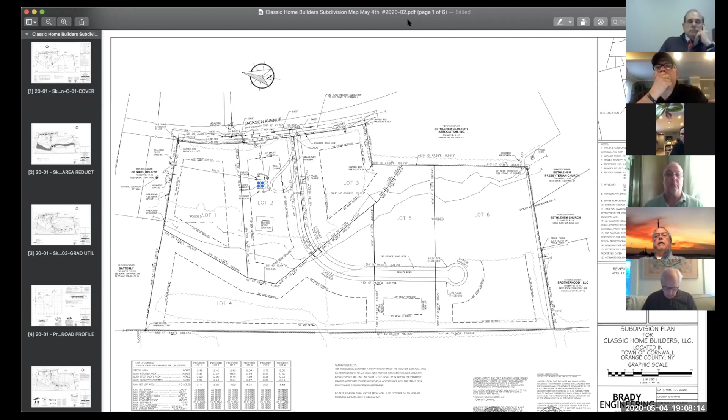Let me see if I can. Did it come up now, Dominic? Yes, Dominic has it marked in blue, I believe. Correct, Dominic? Well, that's me, but let's see if I stop sharing my screen. Does that give you the ability, Pat? Yes, there we go. Now Pat's sharing his screen.

Working out the bugs. Okay, so each of the lots will be served by individual subsurface sanitary disposal systems and individual wells. We have done soil testing for each of the lots, which were witnessed by the town engineer, McGoey Hauser. All the lots are compliant with the current zoning. We've taken into consideration the slope areas and wetland areas.

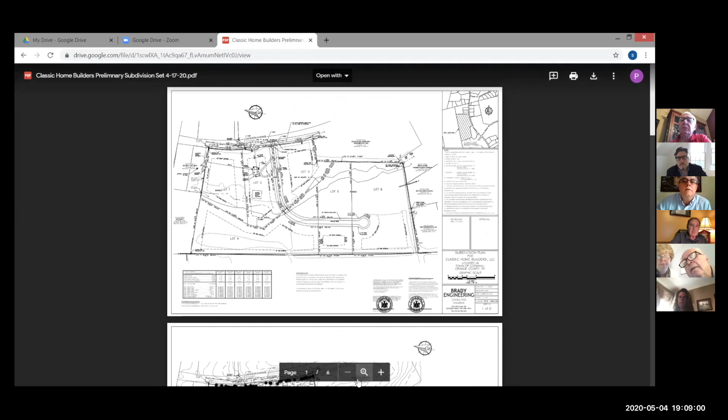Let me make this a little bigger. Thank you. You can see the bulk down here. We do have some wetland disturbance, but it's about 0.04 of an acre, or 2,000 square feet.

There is a stream that cuts across the property. The private road does span the stream. However, we are putting in a metal arch which would span the stream so there's no disturbance to the stream during construction or after.

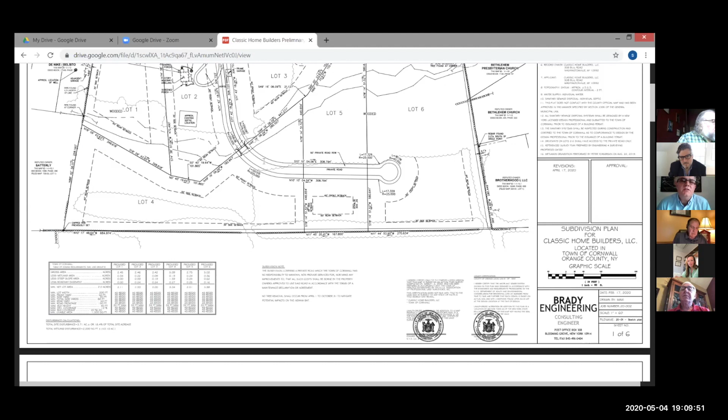We have provided the location of mature trees, and we tried to minimize removing any of them. That would be shown on sheet 2 here. You can see the little black dots are the existing significant trees. The cross hatching is the private road. The light shaded area is the wetland area, and the darker shaded area are the steep slopes of the site.

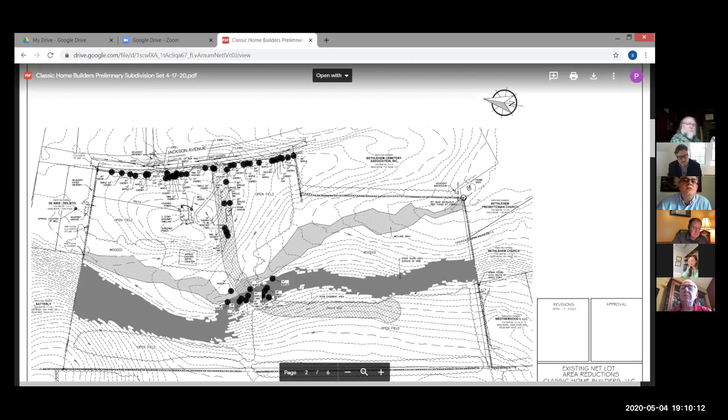So if we come back to the third sheet here, this will be our grading plan, which shows the proposed house, the driveways, septic systems, and the stormwater management systems.

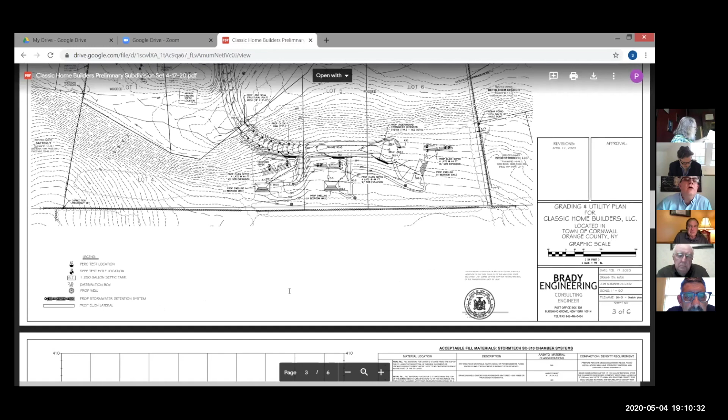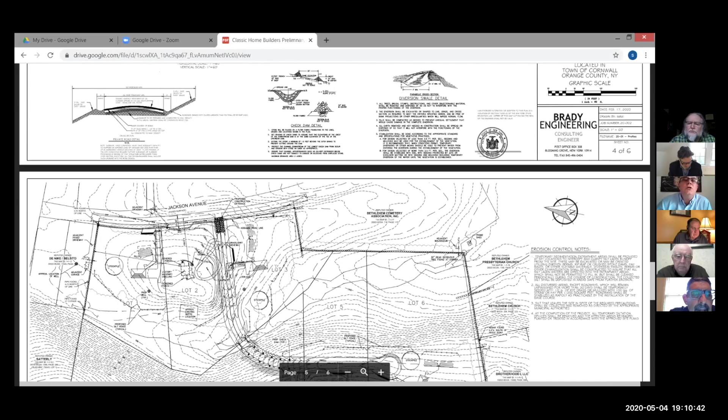We have here a profile of the private road, which is compliant with the town zoning. We've prepared a soil erosion control plan with details and the sanitary disposal design, test hole data, percolation rate, and designs for each individual lot.

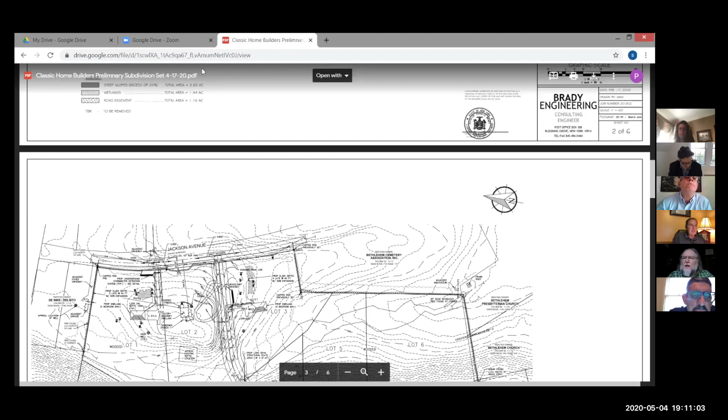Any questions? No, I think that's it. Pat, this would be a public hearing, so we can get to the board questions in a moment.

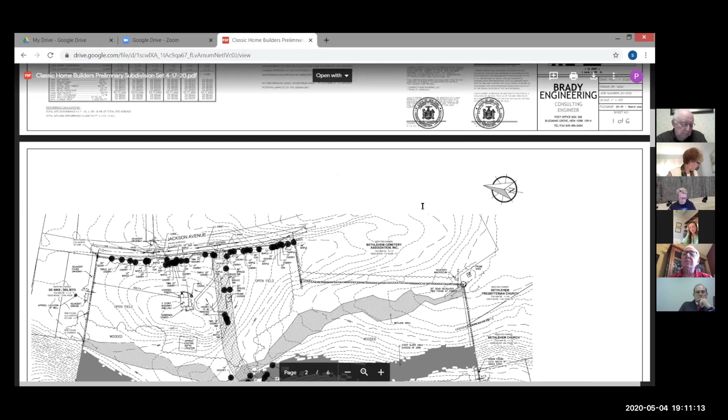But if there's any member of the public wishing to comment or ask a question, I'm not sure how one steps forward, but you're welcome to step forward and please state your name and where you live, and try to restrict your comments to 3 to 5 minutes if possible. Is there any member of the public wishing to make a comment?

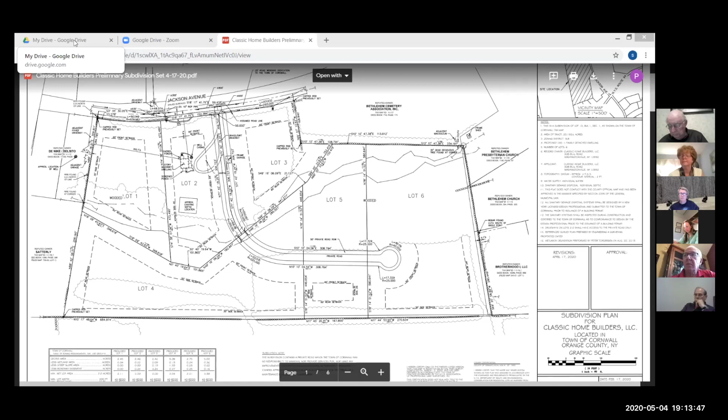Okay, Dominic. Let me pull up the, yeah, and I have it as well. I can share it, hold on just a moment. If you would, that'd be great. Can you see it now? This is an email from Joseph Pepe. Yes.

So this was a comment sent by email to Diane Hines. If you want, I can read them to you, or you can see them for yourself. What is the board's preference? I think that people can read, most people can read. Maybe we should just allow them to read it quickly, or would they rather that they be read into the record? We can provide a copy to Fran so she can have them for her minutes.

This, if I could, was sent out to us several, or at least a week ago. Is that correct? A long time ago? Yes, yes. And it was, if I remember correctly, rather broad questions, not getting into any details or specificity.

I think there are a number of questions here that Pat can probably address, other than number 12, which I don't think is germane. That's fine, I could go through them if the board so wishes. Pat, I think you can address them if you'd prefer. Board, is your preference to have Pat address the questions now, or would you rather have him address it directly to the owner?

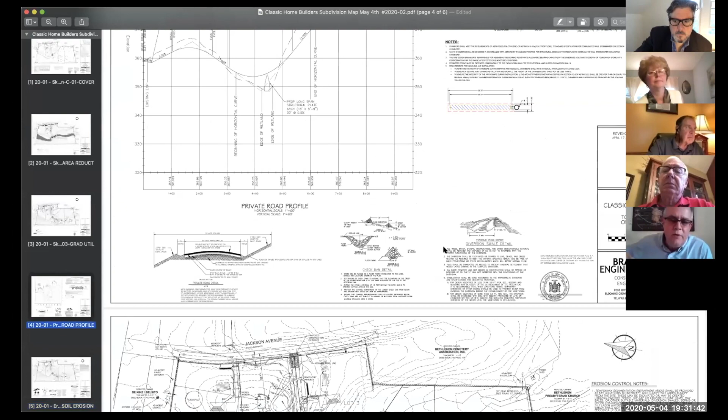If I may, Mark, as part of the town requirements, the side swales along the private road contain riprap, and then there's... I forget what they're called. You understand what I'm asking, Pat, right? Yeah, if you look at—Dominic can bring the plans back up—go to sheet 5. Yeah, I can bring those back up, just give me a moment to pull it up. Yeah, I've got it right here in front of me. There's check dams, you'll see the detail for it on sheet 4. So any velocities of runoff will be reduced before they get down to the stream.

Okay, and who's responsible for the maintenance of those drainage structures? That would be part of the maintenance agreement. Mark brought that to your attention before. I believe the applicant's attorney did send a draft over to Dominic for review. Okay, as long as our consultants are happy with the arrangement for maintenance of those, because those things always need to be—if the town went in there and said, hey, you're not maintaining it properly—there's a maintenance agreement in place that can allow us to compel maintenance.

Is that true, Pat? I have not received that, or if I received it, it got buried in a bunch of emails telling me about how everyone is with me during this difficult time. So if they would resend it, I'll make sure I get my review underway. Right, I will do that. Thank you, Dominic. It would be coming from Dave Donovan's office.

Yeah, the board has traditionally required a maintenance plan for any structures like this that are going to be a permanent part of the solution for limiting runoff to a neighbor's property. So, Dominic, I think you've seen a number of these go by already, so this isn't new territory here.

And Kristen, as far as I know, is there anything in the code that requires our consideration of tree removal? I wanted to say, Pat, great job getting us a map that has the trees identified on it. That's a great resource for us as planners. And I'm wondering, Kristen, if there's anything in the code about what we're supposed to be doing with sheet 2 of 6. Obviously there is some tree removal being mandated by the installation of the road.

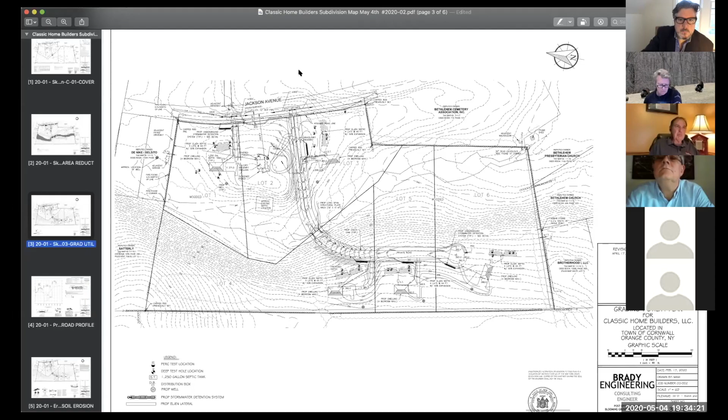Yes, so basically the zoning is not terribly specific. It says that the board should determine that significant mature tree removal is as little as possible, and I believe that's the case. The proposed road is sited in between, with only two trees removed for the road, and the driveway on lot 1 will split two trees as well. I think the board's job here was to determine that the least number of mature trees is removed, and if they believe a significant amount would be removed, their next decision would be to ask the applicant to plant additional trees.

In this case, you have an original stone wall that runs along the property and a lot of brush, as you can see, in addition to the mature trees. You can see that tree line demarcation. So I would think that additional trees would probably disturb a lot of that underbrush along the road, and it also would probably disturb that stone wall. So that's something that needs to be taken into consideration.

If I might add, if you look at the sheet on the screen, you'll see that we tried to run the private road through the thinnest wooded area. So if you look at the outline of the tree lines, you'll see that we went through the narrowest portion to minimize the disturbance.

Okay, I guess the map tricks me a little bit because it looks like the road in the eastern portion of the site... I guess it's only identifying those trees which are in the right of way, not those trees which are not in the right of way. That's my earlier question.

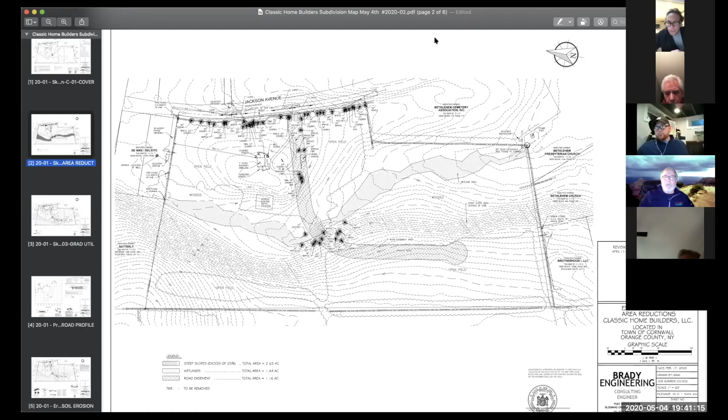You want to do a little overview and then we can move on to a discussion? Yes. This project had been in front of the board and we had gotten caught up in the moratorium. We were proposing a 74,000 square foot building on the property. There were already 2 existing buildings on site, one was 49,000 square feet and the other I think was about 330,000.

The building, like I said, is 74,000 square feet, and we have a new access road into it, and we have the appropriate stormwater management, water quality, and we also did some green infrastructure on the site. So I think we had met all the criteria at the time.

Okay, Kristen? Where's Kristen? Oh, I'm here. There you are. Okay, do you have any comments? Yeah, so basically Leslie did this review. Obviously, the majority of this review was done over a year ago, before the town was in moratorium. So basically what I did was just review Leslie's previous comments, and it appears to me that we addressed all of Leslie's previous comments.

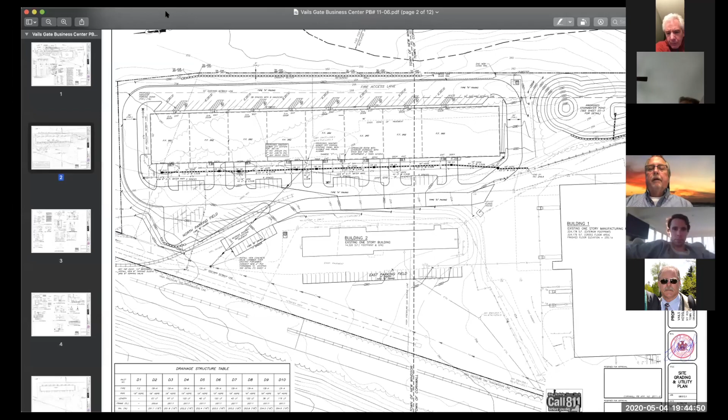In getting the correct number of parking spaces on site, that said, they were hung up in the moratorium. Luckily, they are now clear of New Windsor, who is in their own moratorium now, but they do have an active approval from New Windsor, and they're just back looking for Cornwall now to give their vote of approval.

Which I would recommend. Okay, with that, we'll go to Dominic. Any comments? No comments at this time. Okay, board members, Led.

Oh, great job getting the fire protection taken care of there, Mark. Thanks.

Mark, Mike. Yeah, same comment. Fire protection was my concern way back when. So that's addressed. Thank you.

Okay, Bill. No comments. It's been a long time. It's about ready to go, I guess. Okay, Win. No comments. Mary Beth.

It was before my time, but I'm glad to see we're moving forward. Okay, and Mr. Broadmerkle. I'm good.

Very good. Okay, with that, Dominic, do we require a resolution? Yes, this will require a resolution. I can prepare it for the board's next meeting. Okay, we do not have a requirement for a negative dec, am I correct?

This was a coordinated review where New Windsor was lead agency. Okay, shall we wait until the next meeting to vote on it, or shall we vote on it now and just have you prepare the resolution and allow me to sign it? Whatever the board's preference, I can certainly handle it either way.

I'd recommend we have the resolution prepared. Second. Okay. You're suggesting, Mike, that we just wait until the next meeting and prepare the resolution and vote on it at the next meeting? I think we can vote on it now, and instruct you to sign it after Dominic's prepared it.

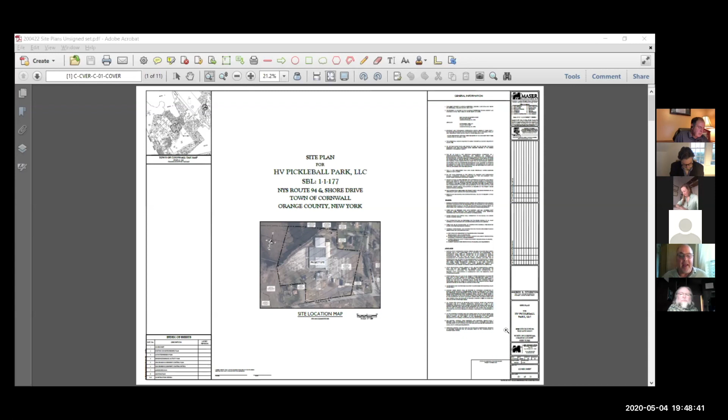The residence on the western side of the property is going to remain; that will be turned into an office space for the property. The barn and the former retail building will both be converted into restaurants — the barn building and the former retail building.

The A-frame building shown on this plan is demolished; it was in this area, that one was torn down. And there's a number of greenhouses — greenhouse, I've got to just take one second.

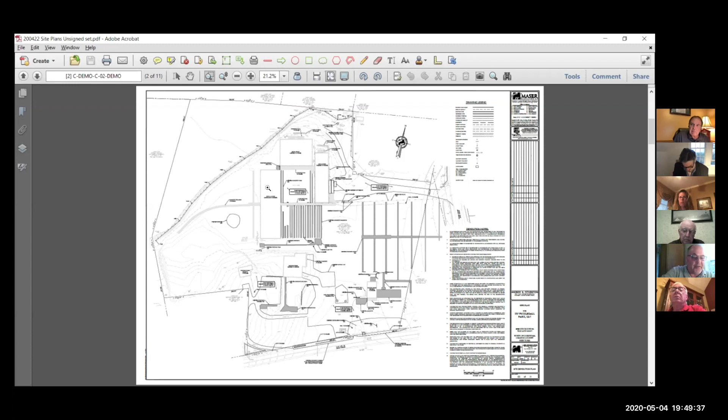Would you? I just got a technical difficulty. I'll be right there. Thank you. Yeah, sure. Yep, you're back, Andrew.

I think we've all been stuck in these houses for too long. That's pretty clear, very difficult. So, anyway. All right.

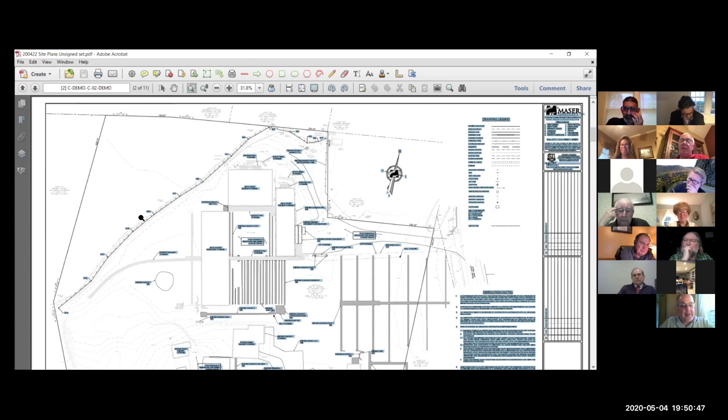Hey, Andrew, just letting you know that Rich and Jean are here also. Thank you.

Andrew, if I could ask a quick question — you were referring to two restaurants now? Two separate restaurants proposed, yes. Okay, that's correct.

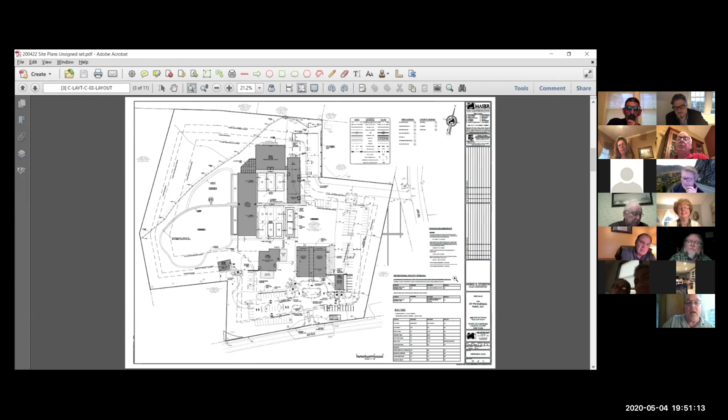Let me see if I can get this thing to go down — completely lost my ability to move this. There we go. Yeah, I'll take you through the site. The existing residence becomes an office. The barn becomes the restaurant.

The A-frame came down, that wasn't suitable for being reused. So this is the new retail building, and then there's a second takeout restaurant here. This is the existing greenhouse that we want to maintain, the indoor courts, the locker room, bath area, and gymnasium.

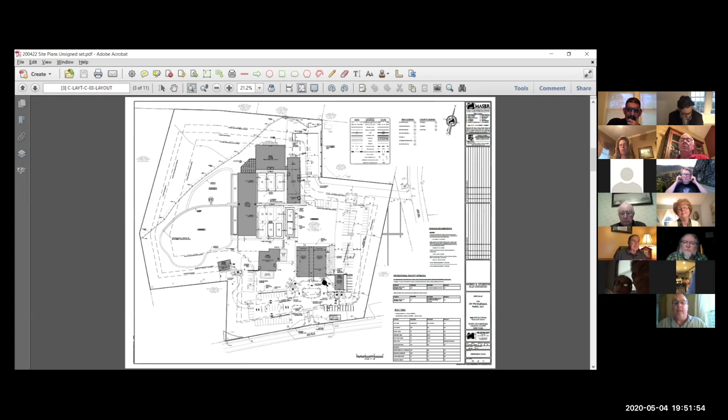I gave the hours of operation for the indoor courts, 10 a.m. to 9 p.m. Monday through Sunday. Outdoor courts, 7 a.m. to 9 p.m. Monday through Sunday.

The restaurants would be 11 a.m. to 10 p.m. Sunday through Thursday, and 11 a.m. to 11 p.m. Friday and Saturday.

I did take a look to see what the Cumberland Farms does for hours. They'd start at 5 a.m. and they close at 12 midnight.

The retail space would be 9 a.m. to 8 p.m. and the office would be 9 to 5. Okay, well, Andrew, do you have anything else that you wanted to say?

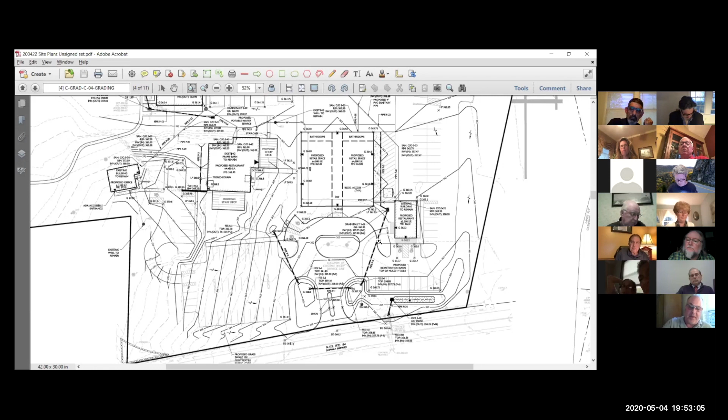We really did very minimal stormwater on this site. The reason is there was so much impervious area on this site to start with. What we were going to do was take up a lot of the impervious areas and make them into green areas. There's a large grass area over here.

There's a large area that was compacted gravel in this area. That's all going to be removed and made into a grass area. So there were quite a few areas on the site that were going to be made more pervious than they are today. That really helped us with the stormwater.

There's 3 wells on the site. We've made communications with the health department. Let me see, I had some other correspondence.

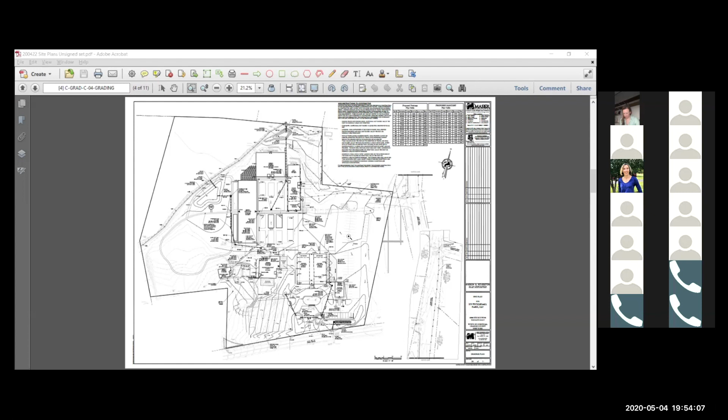So we had the correspondence from Orange County Planning. Also had a letter to the town board requesting entrance into the Beaver Dam Sewer District. We have a letter from DEC, and I could go through all of these, the health department and also SHPO. We had some communication back and forth.

Mr. Chairman, my traffic engineer is here also to answer any questions, and also my landscape architect who did the lighting plan and the landscaping plan. Okay, terrific. Then we'll go for the review, and if there's any questions, we can go from there.

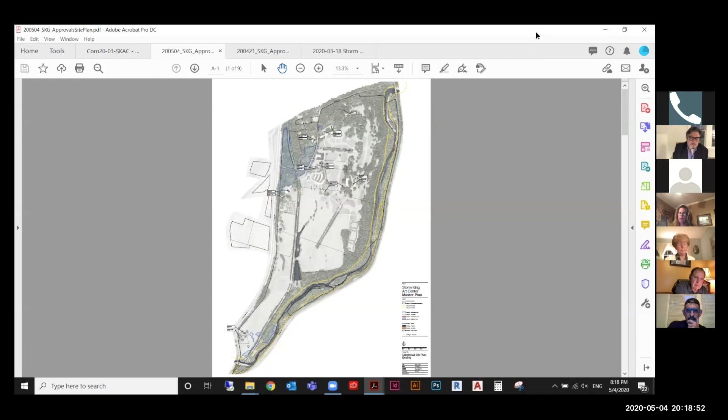So like I said, this is the overall site, but I'll be zooming in to the north portion and then the south portion respectively as I go through each one. If you need me to slow down, if it's disorienting at all, just chime in and I will clarify.

To start, I think it would be helpful to provide a brief overview of the existing site and art center. It's a 500-acre site you can see here on screen, and it's all about, as Amy mentioned, people experiencing world-class art and sculpture in the landscape. Storm King is currently open to visitors spring, summer, and fall, seeing many of its visitors during fall's leaf season.

Hold on, Paul, are you reading from something? I've got some notes that are helping me, yes. Okay, if you could just go a little bit slower, because when you read, you tend to kind of zoom along there. Sounds good. Thank you. No problem.

So visitors, and I'm going to have to slow down because I'm going to mark up as I go now. I'm going to flip to the north site. Visitors, staff, and service vehicles currently enter from Old Pleasant Hill Road, right here off of Orrs Mills.

And they park within a variety of parking lots throughout the site. There's a parking lot here in the north, there's a parking lot here in the south, and there are some smaller lots here and one up at the museum building. So currently people enter and go to a variety of lots throughout the site.

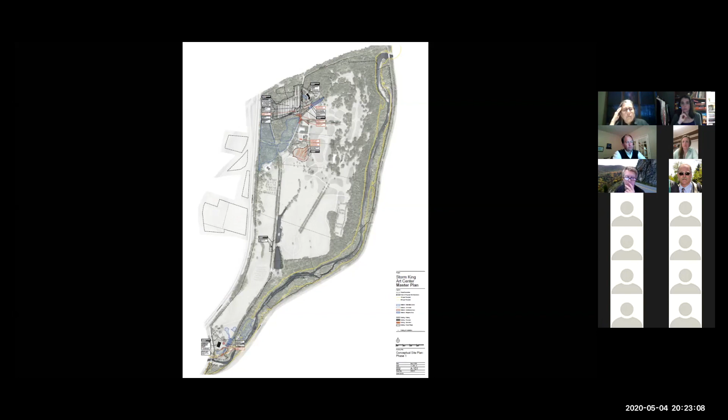So this was all taken to heart when establishing the master plan vision for the site. So the plan you see up front is phase 1 of the plan. I'm going to zoom in now to the north of the site so we can talk through it in a little bit more detail. But before we get into the elements, we wanted to talk through 3 main design principles.

The first is about removing cars and traffic from the heart of the site. We're doing this by consolidating all of the service-intensive uses at the edge of the site with the most direct access possible to the exterior road network. The second design principle is about reclaiming land that is currently used for parking for more opportunities for sculpture and art. Third and finally, to move all parking and new buildings within that tree line that we sort of characterized as a defining feature of the Storm King landscape.

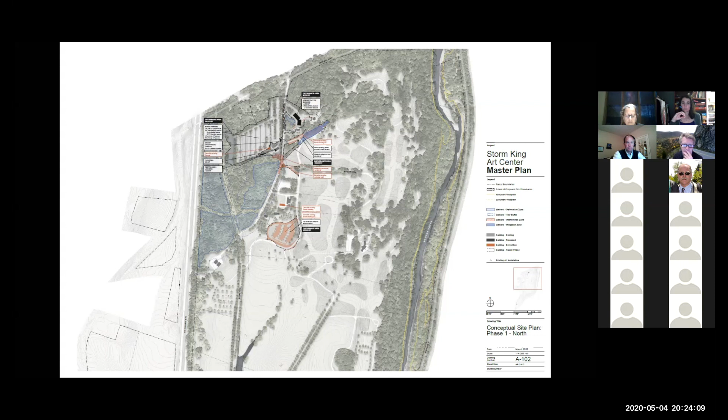So with this new plan, from a parking standpoint, the current south parking lot and north parking lot are removed, and all parking is consolidated in a new lot in the north, which I'm now highlighting in blue.

So this is also now shifting to a park then pay model. Cars are able to enter still off Old Pleasant Hill Road into the parking lot, park their car freely, so there's free movement of traffic, no slowdowns for payment. Visitors are able to walk from their car into a series of small pavilions, including ticketing, canopy shelters, restroom, and information, and all of this is concealed within the tree line of Storm King. The idea is people are able to park their car, get off on foot, and experience that sort of threshold into Storm King at a slower pace, while not causing any of the traffic backups that are currently happening from time to time.

So that's on parking. Now, one last note I'll add is this lot is designed with ample drop-off for coach buses and taxis as we look to incentivize connection to mass transit, including the Metro North train station.

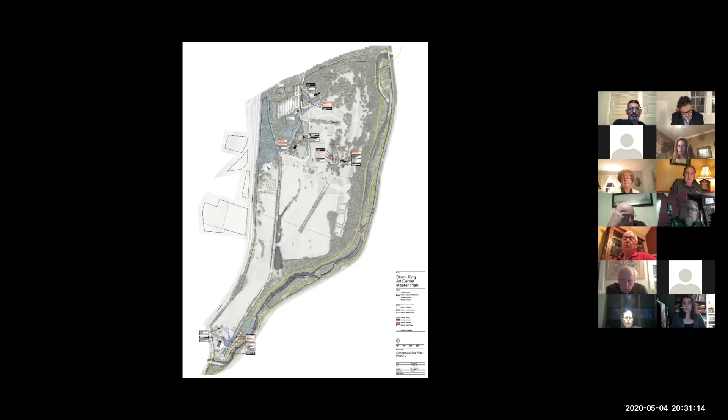Now I'm going to move on to the phase 2 plan. Again, this is the site as a whole, but I'll talk through the main elements.

Now looking again at parking, I'm going to go to the south of the site. There is potential to add more visitor parking with an additional visitor entrance at Bunny Road. This is the area identified for that potential additional visitor parking, which would have the same access from Pleasant Hill Road via Bunny Road. Now, back to the north, there is currently a parking lot in front of the museum building.

It's going to be retained, but only for very limited use in phase 1. By phase 2, it can be re-landscaped and will go away completely. All ADA accessibility will be resolved through an existing elevator structure, an improved pathway network, and a tram system.

In terms of visitor facilities for phase 2, Scandrett House, at the entry, will be renovated as an information center and museum shop. The museum building will be renovated for improved exhibition space, including a below-grade gallery addition, which you can see at the back here.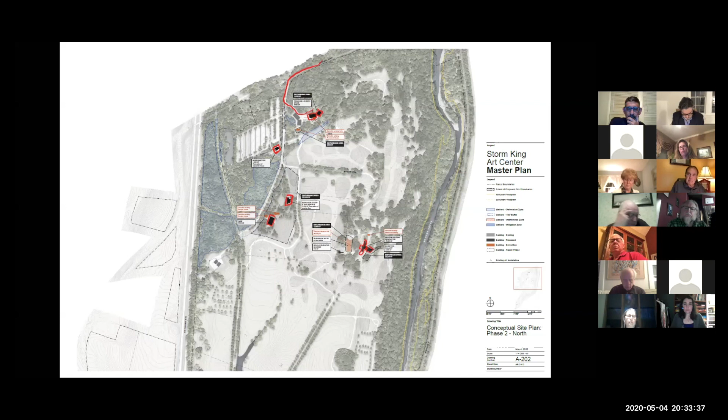And there is this bike barn, which we referenced here—it will be refurbished for educational programming. And finally, back down to the south, to support that new south parking, there would be a small ticketing and welcome pavilion.

The Conservation Fabrication Building will be expanded to house dedicated art storage, and another existing barn structure will be refurbished for exhibition space.

So that covers all of the main elements. Thank you for your patience, and let me know if you have any questions once Mike talks through the traffic and stormwater management in a little bit more detail.

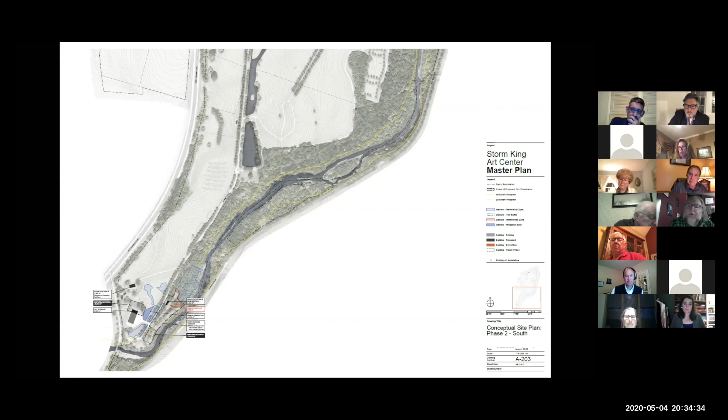Thank you, Paul. That was very well done. Mike? Sure, I'm going to share my screen now. Hit this stop, I think. There you go, Mike.

Okay, can everybody see that? Yep. Okay, so this is a progress set of plans that we submitted along with the package that you have, just to orient everybody—this is the same rough site outline that was shown on Paul's colored plans, but these are engineering plans, so they're not quite as exciting.

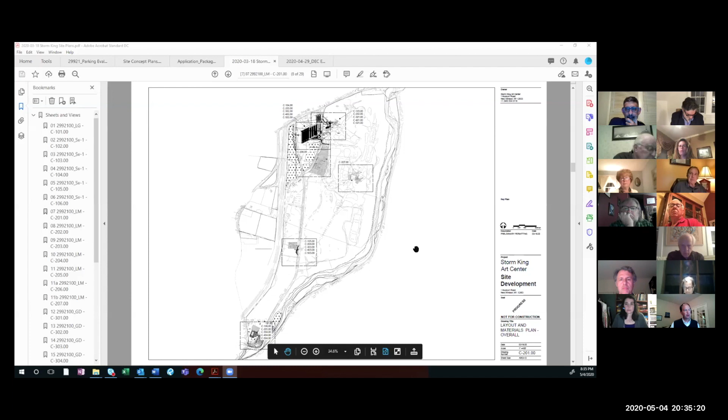This shows the north area, the work there, the pond pavilion, and the work down at the southern end of the site. So I just wanted to walk through these quickly. Paul explained in detail everything involved with the master plan, but just to show it at a little bit larger scale.

So this is the proposed administration building that Paul referenced, with its own separate access off of Old Pleasant Hill Road. To the left of this plan is a portion of the north parking lot. You would come down Old Pleasant Hill Road, enter the north parking lot here. This is the bus drop-off and taxi/Uber pickup area in this oval shape here.

Page down, and this is the big chunk of that north parking lot. So this again shows that bus drop-off area, all of the parking spaces, and the welcome buildings that Paul described. One other thing I want to point out here is this Old Pleasant Hill Road.

We're looking to return this section of it into a natural state to really separate the vehicular and pedestrian experience at Storm King. So once you park in this lot, everything from this point on as a visitor is a pedestrian experience, or you're on a tram or a bike. The new access into the remainder of the site will be peeled off and connect to the existing circulation system within Storm King, providing that separation between pedestrians and vehicles.

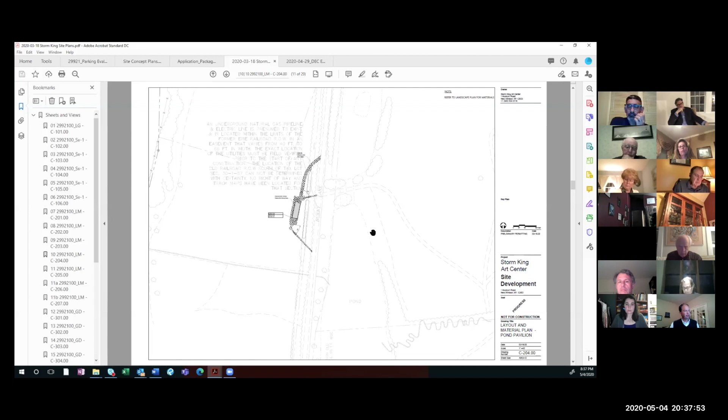This plan shows the pond pavilion as it's located to the west side of Bunny Lane. The two ponds are here and here. This provides a visitor spot down on the southern end of the site for resting, getting water, whatever the case may be. And then this is the southern end of the site with the conservation, fabrication, and maintenance building, with access off of Pleasant Hill Road, and then improvements to Bunny Lane.

So we are in the midst of wrapping up a full traffic study for the entire project that will look at sight distances, impacts to the surrounding roadway network, and we'll go into detail on the access and circulation into the north parking lot. Providing this single point of access, we're confident that this will handle the traffic and visitor parking in this lot.

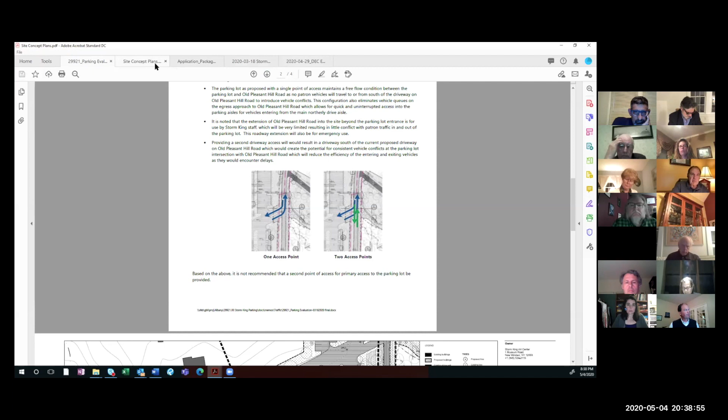I can show you something. Might be a little tough to see here, but because there will no longer be visitor access beyond that driveway down Old Pleasant Hill Road, this is really going to be free flow traffic into and out of the parking lot through that - oops, wrong plan - through this single access point. So from this point south, there really won't be any traffic other than a little bit of employee traffic and the occasional deliveries within the park.

As I said, we'll be submitting a much more detailed set of site plans with our next submission to the town, along with a traffic study and a full stormwater management design report. One other thing I'll point out is that all of the new facilities will be served by private wells and septic systems. Those designs will also be incorporated into the next package you receive.

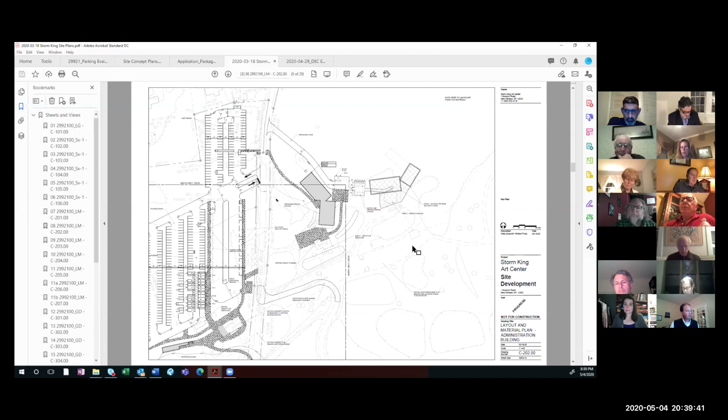I think that's all I had. Now if you have any specific questions, this is a full set of site plans. I don't want to, but as I said, they're in progress - there's a lot of details in them with grading and some utility layout, but I'm not sure you'd want to get into that level of detail at this point. But very professional, very well done, and I'll turn it over to our consultants for opinions so that if there are any questions, they can be addressed.

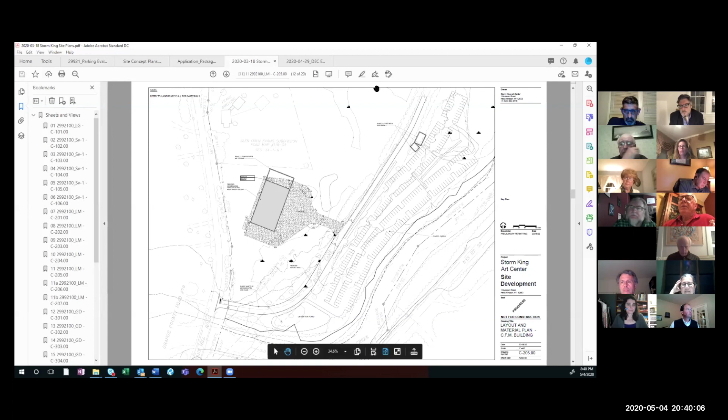Oh, Kristen. All right, now, can you hear me? Yep. Yes, we can. All right. Figuring out this volume thing now that we're on the last applicant.

So as the consultants mentioned, the plans are fairly preliminary at this point. So our comments on site plans are really that they just need to be a little bit more developed. I'm sure this is a first submission just to orient the board as a first round, but as they progress, we'll need all of the items required in the town zoning code - bulk tables, parking calculations, title block, existing conditions, and so on. Those are things to look for before we get into the public hearing stage of the review.

Square footage as well on the buildings, at least on the buildings proposed for phase 1, would be helpful for everyone to review. I'm going to jump into SEQR because that's a big part of the submission so far for this month.

In terms of SEQR, the applicant has provided, as Valerie discussed, an outline for an expanded Part 3 EAF. An expanded Part 3 is probably not something this board has dealt with a lot, but it's basically a compilation of the analysis to address a lot of the impacts or potential impacts identified in the EAF. The applicant has provided an outline for the board to review, and basically what I'd be asking the board to do is review the outline to make sure everything is in there that the board is interested in getting a little bit more analysis on. I think essentially the outline follows the EAF - it follows all of the yes checks in that EAF, which are provided and expanded upon in the outline.